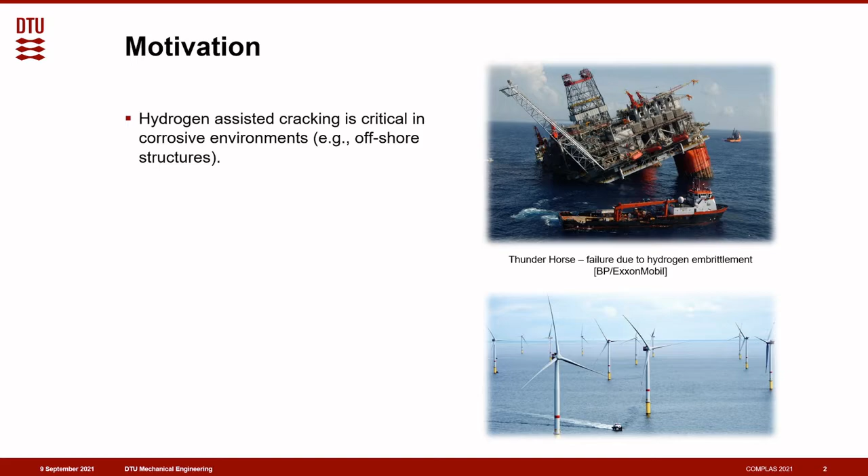In addition, hydrogen is seen as the energy carrier of the future, therefore fostering a notable interest in the design and prognosis of infrastructure for hydrogen transportation and storage. And in the majority of these applications, susceptible components are exposed to alternating mechanical loads, and therefore being able to predict the synergistic effects of hydrogen and fatigue damage is of utmost importance.

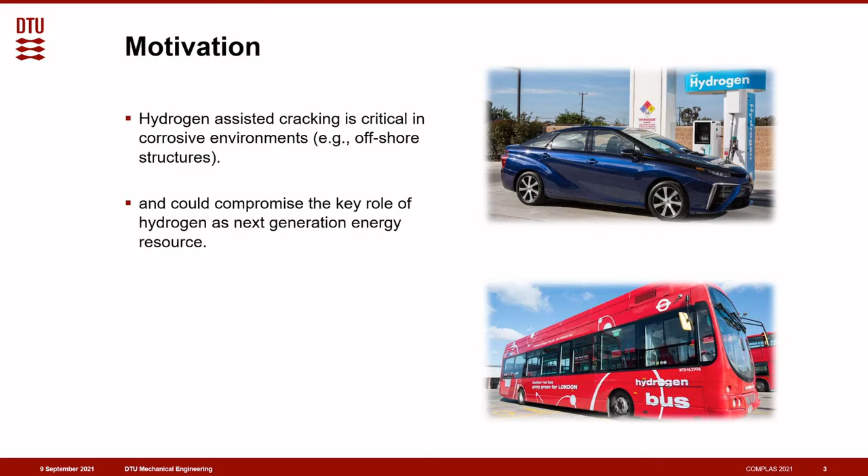Okay, let's get started with the theoretical part. As you might already know, the phase field fracture model has recently emerged as a promising variational approach to capture initiation and propagation of complex cracking patterns. The idea behind this method is to use an auxiliary field to track the crack-solid interface implicitly, in the sense that we no longer have a sharp interface, but the auxiliary variable, the so-called phase field, is telling us where the interface lies.

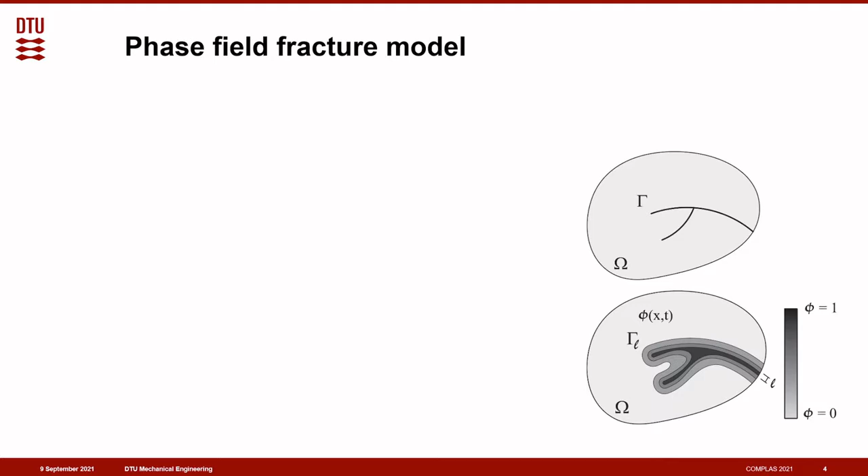For example, the phase field can take the value of 1 in the crack phase and the value of 0 in the undamaged material points, varying smoothly in between. One of the beauties of this method is that it provides a computational framework for Griffith's energy balance. As you know, Griffith, one of the fathers of fracture mechanics, postulated that a crack will grow if the energy released by the solid reaches a critical value, the so-called critical energy release rate, or basically the material toughness.

One can formulate Griffith's energy balance in a variational form. However, minimization of this Griffith energy functional is hindered by the fact that the crack surface gamma is unknown. And here is where the phase field paradigm comes to our rescue by transforming the surface integral into a volume integral. Two things that I want to emphasize here.

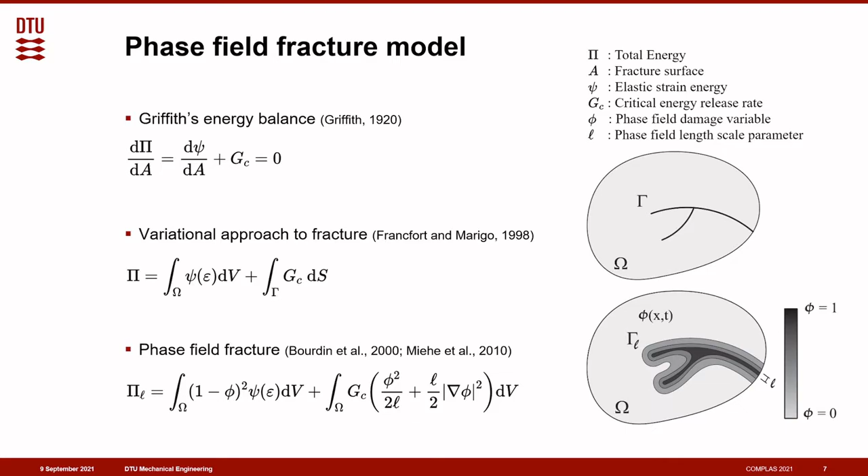First, by looking at the first integral, you can see how the phase field parameter affects the stiffness of the solid through a degradation function, therefore acting similar to continuum damage models. And from the second integral, you can see that there is a gradient term and consequently a length scale. So the model is non-local, which ensures mesh objectivity. Basically, results are mesh insensitive as long as this length scale parameter is resolved.

You can get a good overview by looking at these two balance equations. The first equation is the solution to the deformation problem, basically the standard balance of linear momentum with the phase field degrading the stiffness of the solid. And the second equation is the phase field evolution, which is basically a competition between the strain energy density stored in the solid and the toughness of the material.

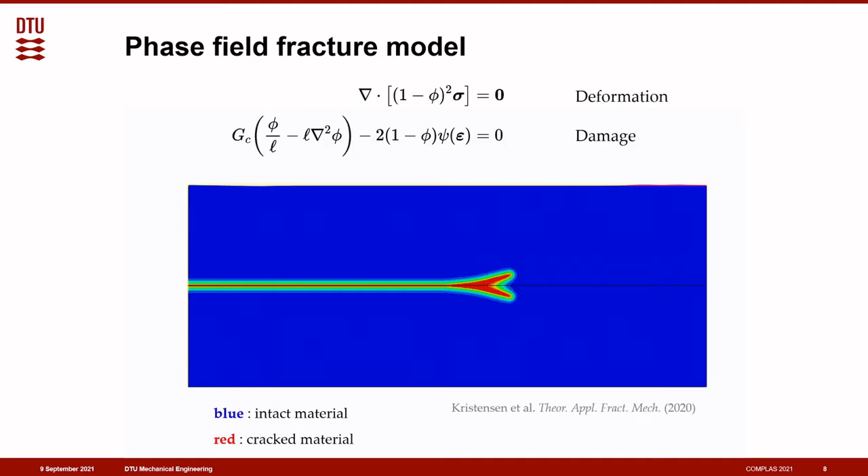And just by solving this simple system of equations, we can capture on the original finite element mesh, in both 2D and 3D, very complex cracking patterns like the one I'm showing on the screen. This is crack branching due to the application of a dynamic load. So we can capture both branching and merging of cracks, nucleation from arbitrary sites, and complex crack trajectories without any convergence issues and no need for remeshing.

The next step is to include the effects of hydrogen. It's a very challenging problem that crosses the disciplines of material science, structural mechanics, and chemistry. But in broad terms, what we know is that atoms of hydrogen enter the material, migrate fast through the crystal lattice, and are attracted to areas of high hydrostatic stress or high volumetric strains, where the lattice expands and there is more space for hydrogen to accumulate.

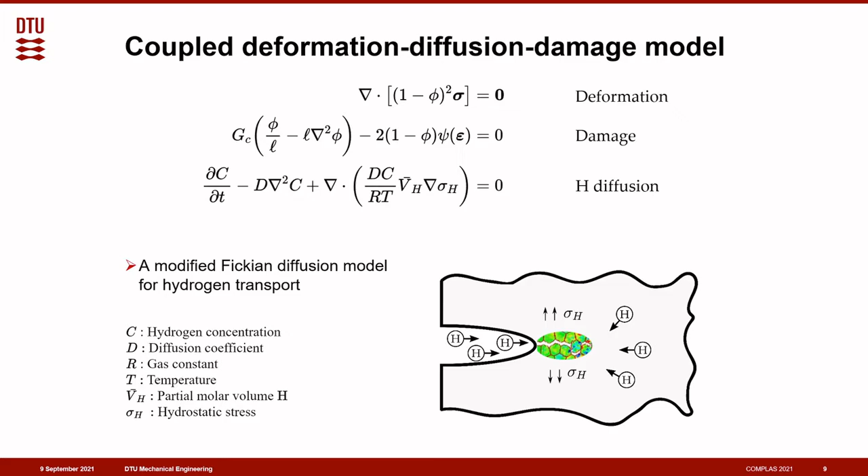So first of all, we model hydrogen transport based on an extension of Fick's law of mass diffusion, basically the third equation, in which hydrogen diffusion is partially driven by the gradients of hydrostatic stress. In addition, we made the toughness of the material depend on the hydrogen concentration, as we see in experiments. The question is, of course, how to define that dependency. The logic that we follow is an atomistically inspired degradation law.

Based on atomistic simulations, what we see is that the fracture surface energy decreases with the hydrogen occupancy. So quantitatively, by running atomistic or DFT calculations, we can see how much the fracture energy decreases with the hydrogen content. For example, if your interface is full of hydrogen, which corresponds to an occupancy of 1, you reduce your fracture energy by 40%. And that explains why hydrogen is so dangerous for metallic materials.

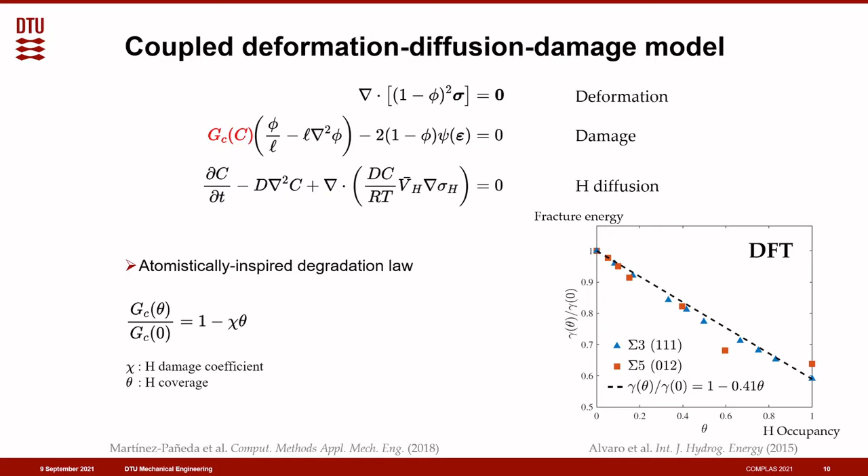And finally, we incorporate the effect of fatigue damage into the modeling framework. And this is done by introducing a fatigue degradation function, which effectively modulates the fracture toughness of the material as a function of the fatigue history experienced by the solid.

And the fatigue history variable, alpha bar, is chosen as a cumulation of elastic strain energy stored in the solid, which is also degraded by the phase field damage variable. Note that the accumulation of this fatigue history variable only takes place during the loading stage and not unloading. And for values below the fatigue threshold controlling parameter, alpha t, the fracture energy remains unaffected by fatigue.

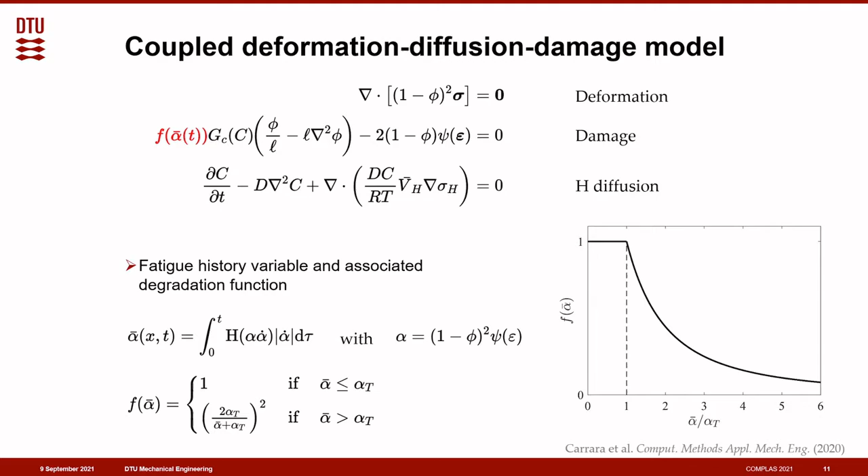Okay, now I'm going to show you some results of this study. But first, let me mention that the modeling framework here is implemented in the commercial finite element package Abaqus using its user-defined subroutines. And the coupled finite element equations are solved in an implicit time integration scheme using a residual control-based staggered algorithm. We have addressed several case studies to investigate the performance of our numerical implementation.

The first case study is a well-known boundary layer formulation, which is used to gain insight into fatigue crack growth under small-scale yielding conditions. So what we have in the left figure is the crack extension as a function of the number of cycles and for different environments. The results shown here reveal that the model is able to capture the expected trends. For a given number of cycles, the higher the hydrogen concentration, the larger the crack extension.

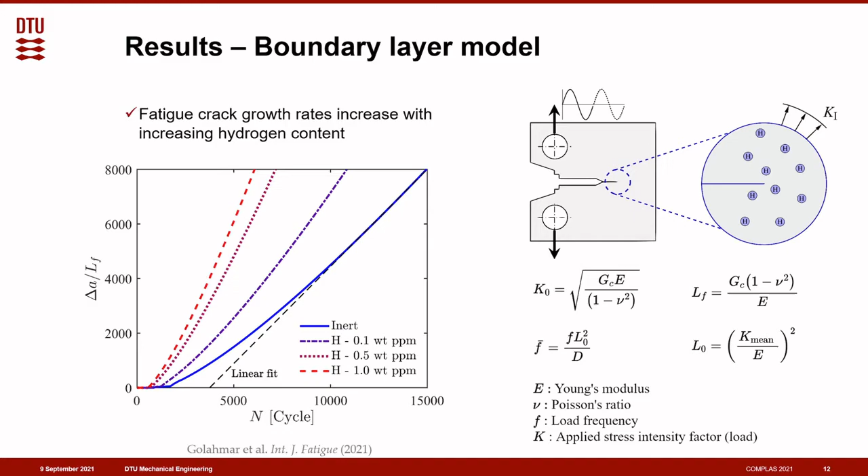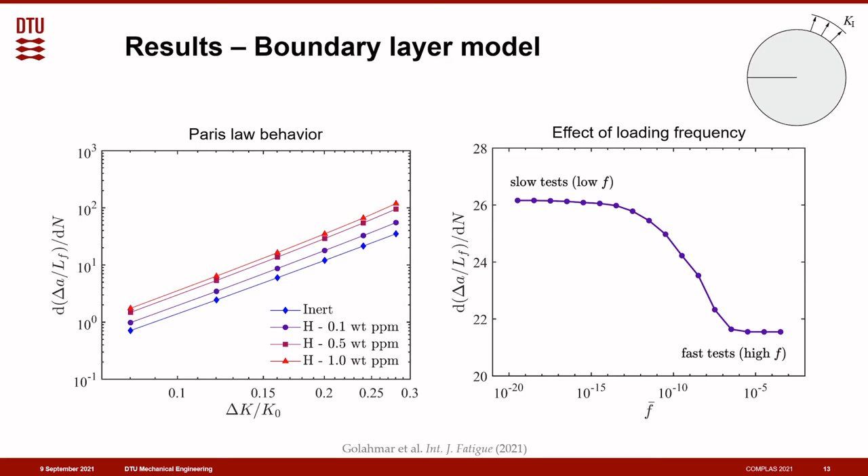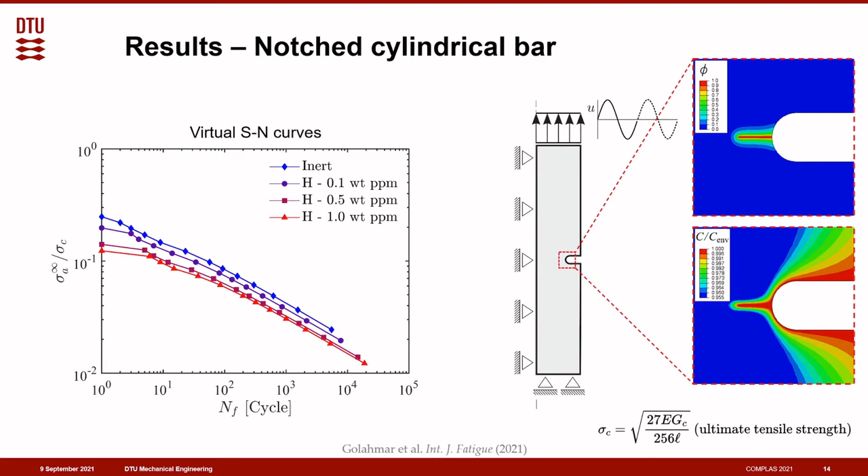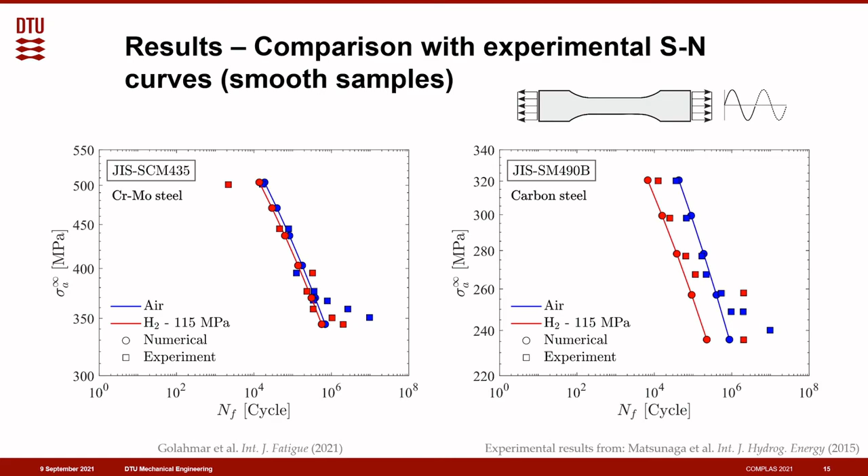And in conclusion, we compare our model predictions with S-N curves obtained from fatigue experiments on smooth samples. So basically, a typical dog bone specimen, which is widely used in fatigue experiments. The samples here are subject to uniaxial tension compression cyclic loading and tested in both air and high pressure hydrogen gas. And this is done for two types of steel. So what we can see here is that despite the scatter, which is typically associated with these fatigue experiments, the virtual S-N curves predicted here are in good agreement with the measured data.

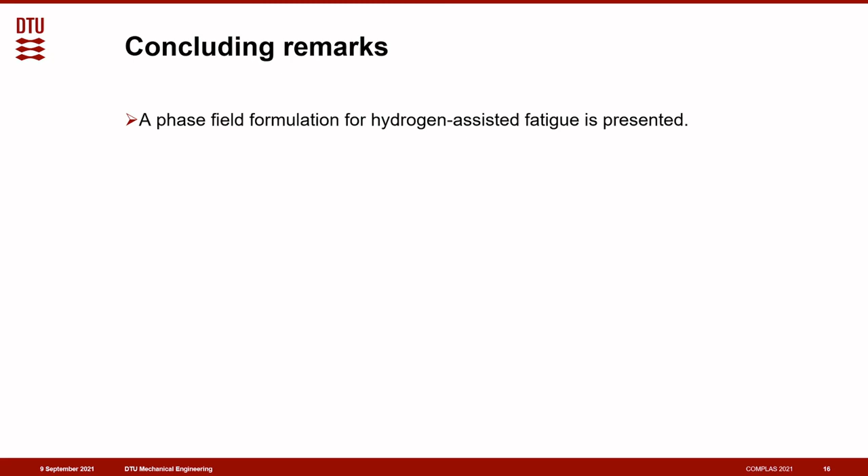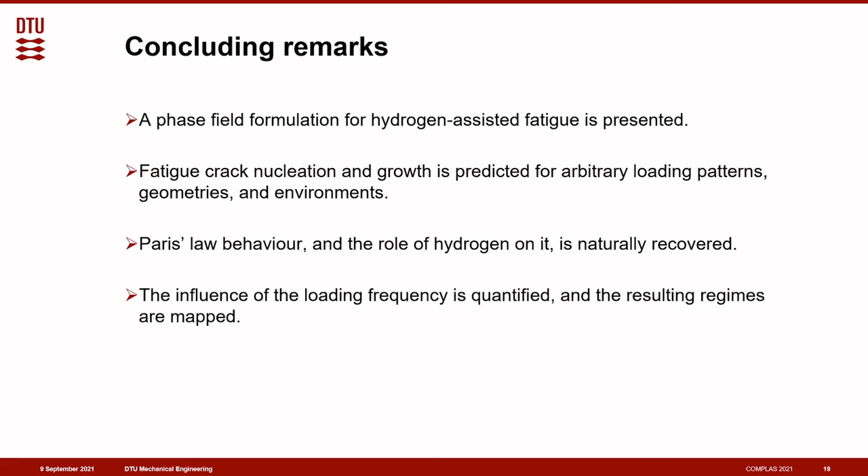Okay, and at the end, let me conclude my presentation here. We have presented a phase field formulation for hydrogen-assisted fatigue. We have shown that the model is able to predict fatigue crack nucleation and growth for arbitrary loading patterns, geometries, and environments. Paris law behavior and the role of hydrogen on it is naturally recovered by the model. And then the influence of the loading frequency is quantified, and the resulting regimes are also mapped. And finally, virtual S-N curves are obtained, showing a good agreement with experiments.